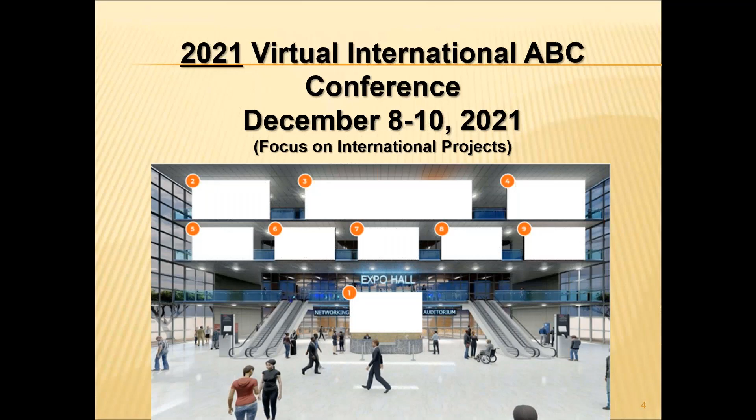The 2021 conference is going to be completely 100% virtual, December 8 to 10. 30 state DOTs, FHWA, and TRB are co-sponsors, including the ABC UTC.

We have a list of keynote talks and keynote speakers to introduce to you. The conference will kick off with comments by Carmen Swanwick, the chair of the AASHTO COBS. Our keynote speaker will be Dr. Firas Ibrahim, who I call a man of ideas, with the US DOT, so we are very delighted to have him as a keynote speaker. We have assembled an impressive list of international speakers that I'm sure you're going to enjoy.

From Switzerland, we're going to have Eugen Brühwiler discuss bridge deck overlays and beyond. From Sweden, Dr. Peter Collin will discuss some innovative prefabricated systems being used in Europe. From Switzerland again, we'll have examples of UHPC field applications. From China, Dr. Xu will discuss ABC and high-speed rail.

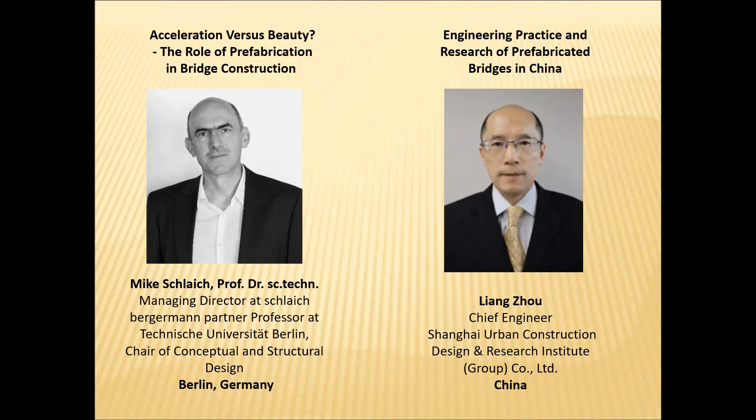From Berlin, Germany, we have a very interesting presentation by Mike Schlaich discussing ABC and the role of prefabrication in bridge construction. Dr. Zhou from China will discuss how ABC and prefabricated bridges are being used in China, and how everything is being transformed into a digital form.

We have two very knowledgeable speakers, McDonald from London and Joseph from Amsterdam, who will discuss digital transformation and building smart. This is a really interesting one that will introduce you to some of the efforts going on with digitization. On the US side, we have some invited keynote speakers very familiar to you.

That's why we didn't put the names: Ben Graybill, Bala, Mike, Culmo, Wasim, Ted Zoli, and Doreen. Everyone in the bridge community knows them.

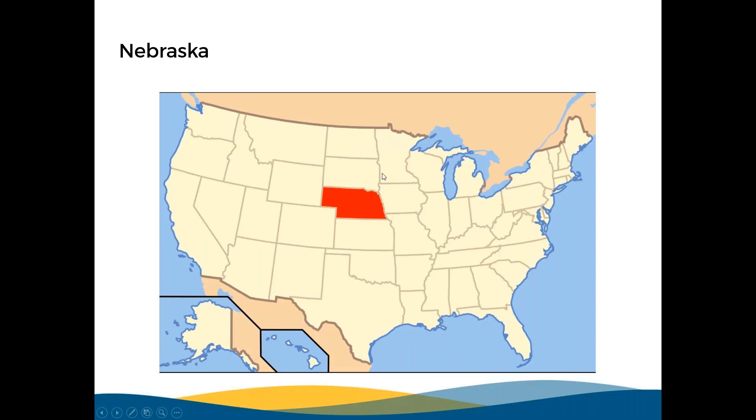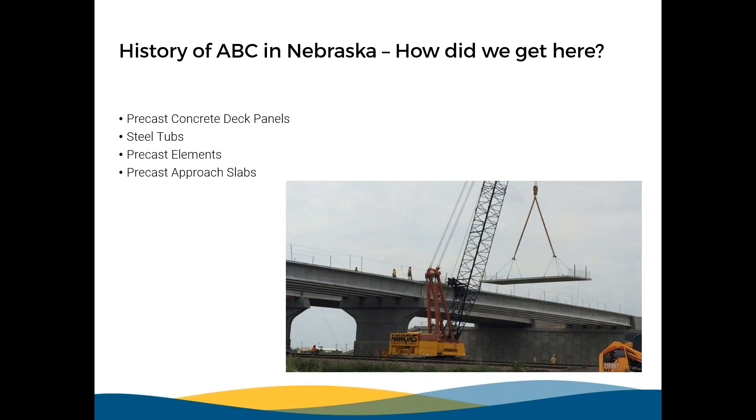So, history of ABC in Nebraska, and really how did we get here? We went through a few projects dealing with precast deck panels. We did some steel tub girders, and we've evolved through that, and we've got to the precast elements, and then some precast approach slabs that we're finding are working for us pretty well.

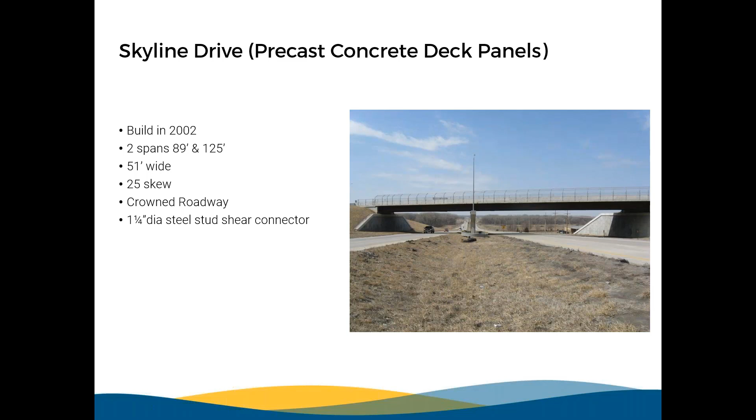Back in 2002 was really our first, I guess what I'd call an accelerated bridge construction project. It was on a bridge just west of Omaha. Probably not the easiest bridge to start with, uneven spans. We had a 25-degree skew. It was a crowned roadway, so we're putting deck panels on a crowned roadway. And we tried something new with the 1 1/4 diameter steel stud shear connector. I won't talk a lot about that, but it comes into play later.

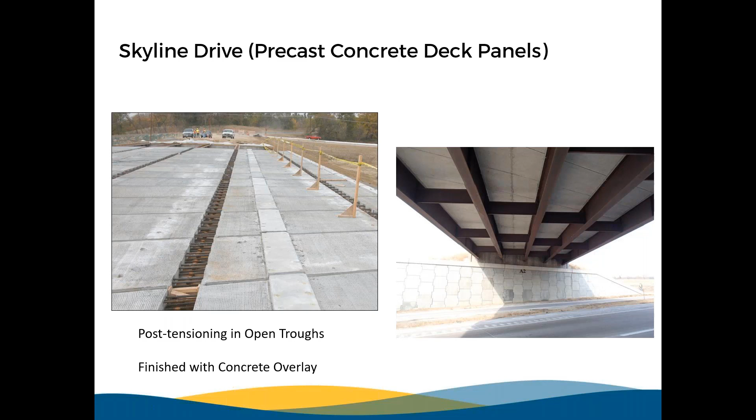So this is the project, and you can see on the left, we set the panels, they're full width. It was a crowned roadway, so we actually had the panels, we had a hinge, if you will, in the middle to make the crown go both ways to basically break the slope to go both directions. The open trough, the post-tensioning strands went through the open trough. They were mid-depth of the precast panels, and we'll talk a little more about that later. Then after this one, we had to finish with an overlay. We put a concrete overlay on these panels on this bridge when it was finished.

2003, we did a project using steel tub girders, a little more simple project, equal spans, 0 skew. We did use 100 KSI high performance weathering steel. We believe it was the first bridge with 100 KSI high performance weathering steel in the United States. So we got that feather in our cap.

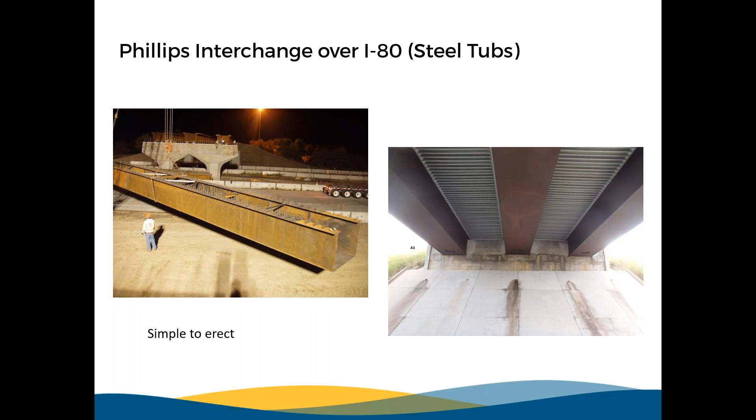It was really simple. The contractor really felt it was simple to erect these girders. Again, it's kind of going towards accelerated construction. I'll show you why in a little bit. We literally shut the interstate down for a night, put the girders up, and then opened the interstate back up after that. You can see the finished bridge on the right side.

We went on in 2008. We did another project with steel tubs. This time we did have a skew, made it a little more complicated, a 24-degree skew. This time we used 70 KSI high performance weathering steel for the steel boxes.

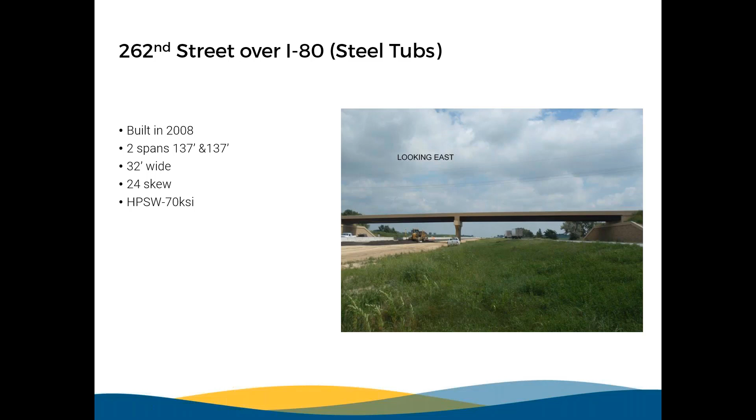So this will get a lot more into accelerated bridge construction. You can see we actually pre-topped, or put the deck on these girders. They were at the site, not on the substructure, but off to the side. The contractor placed the deck on. You can see on the right side these headed rebars.

This was before we had used ultra high performance concrete, so we didn't do that here. We just used regular concrete, but we used these headed rebar. These were screwed on. The rebar was threaded, and these heads actually screwed on like a nut. It took a lot of time to do that, and they're expensive. I think they were $1 or $2 per head, and that was a number of years ago.

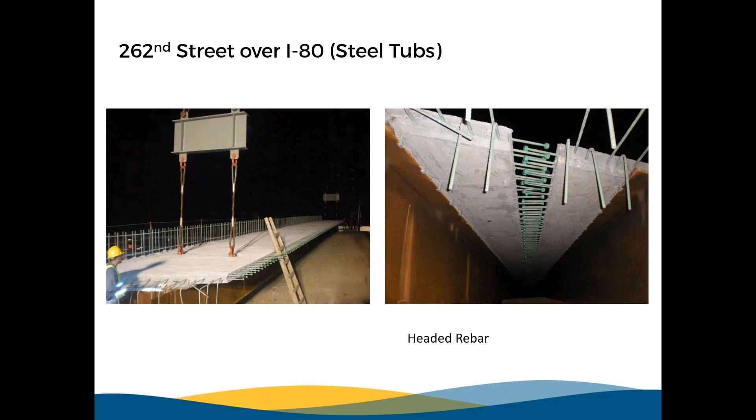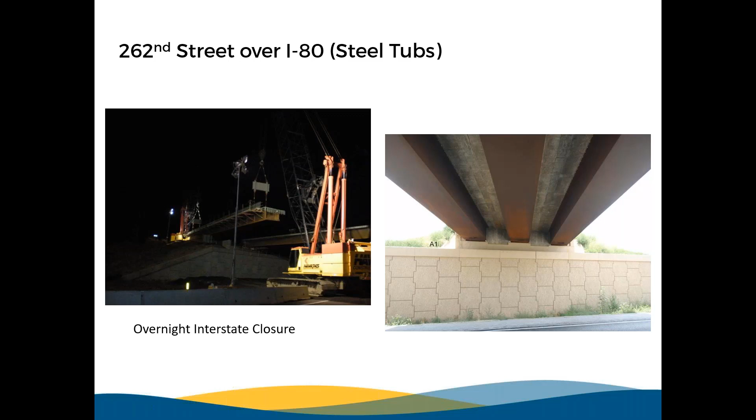So just showing the progression of where we've gone to. Pretty easy, pretty simple. It took an overnight closure. Contractor Hawkins lifted these into place, the 3 segments, and basically in the morning you pretty much had a bridge in place. It was 2 span, so it took 2 nights of closure, but the process went really, really well. Dr. Azizinamini was in Nebraska at the time and helped us out with this project.

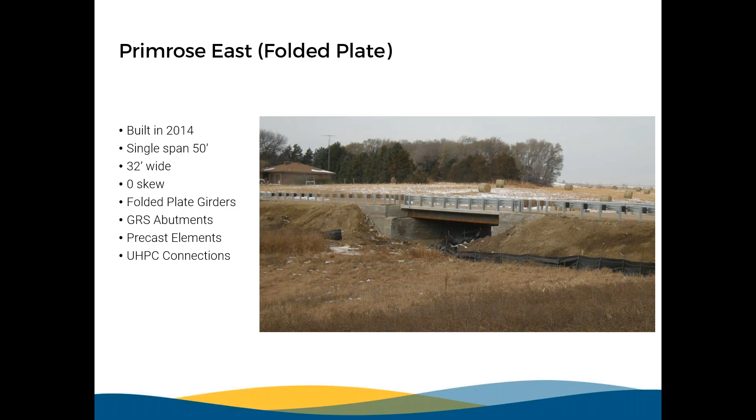On to Primrose East. This was folded plate girders. Looks like a very simple bridge, but there's a lot going on with this bridge. We did this in 2014, just a simple span 50-foot bridge, 0 skew, so that helped. But we had steel folded plate girders, again through Dr. Azizinamini. We did a geosynthetic reinforced soil abutment, so that made the abutments pretty simple. We had precast elements, and this was our first effort into ultra high performance concrete.

So the folded plates were delivered near the site. It was basically in this little town of Primrose, and the bridge was a mile or two out of town. So the contractor set this up and pre-topped these girders with the concrete deck off-site, brought them on site. You can see in this picture where they had lifted them into place. The deck is on, the back wall is on, and they just put these side by side until they basically had a bridge. So here's the difference between the other bridge I showed you, the 262nd, that had the headed rebars and the wider opening.

On the left is the joint between the deck panels, or deck segments. We use ultra high performance concrete for this, so the spacing is much more narrow - it's just a straight bar with no head on it, so it was really very simple to do. Of course, we had to get the contractor and the supplier in with the ultra high performance concrete to do that work, but it was interesting.

It worked well. We actually did a water test on this to make sure the joints weren't leaking, and it still is just a really tight structure. We're really happy with this project.

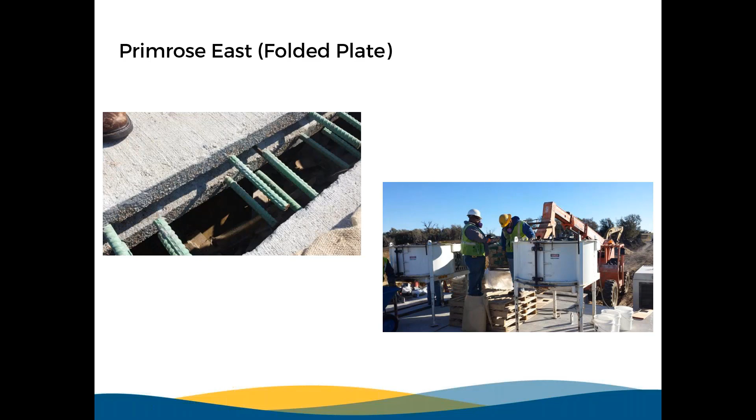Our last one I'm going to talk about before our topic of the day is our Kearney East bypass precast deck panels. These were full depth this time, done in 2016, equal spans, but we had a 14-degree skew, so it made it a little more complicated. They were twin structures - one was cast in place concrete deck, and this one was precast deck. It was a tangent roadway, so we didn't have to deal with the crown, and it was over both a railroad and a highway.

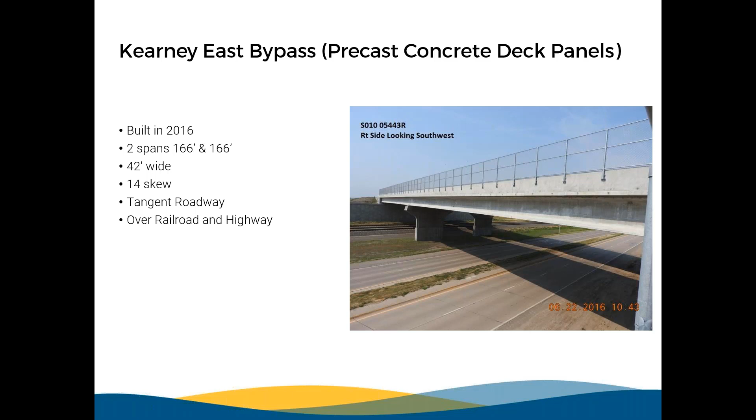So you can see I'm lifting the panel on the left side. It's full width. Again, it was a tangent roadway, so the slope went from the median all the way out, so it didn't break like a crowned roadway. So this one was easier in that respect.

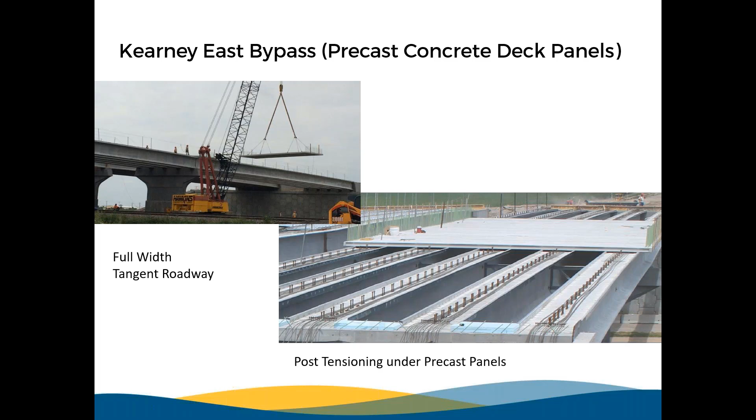On this project, we actually did the post tensioning underneath the panels, whereas on the Skyline project with the open troughs, the post tensioning was mid-depth of the panels. This was underneath the panels. We were a little concerned by doing that, but working through our University of Nebraska research with Dr. Maher Tadros and Dr. George Morcous, we found we could do this, and it worked out really, really well.

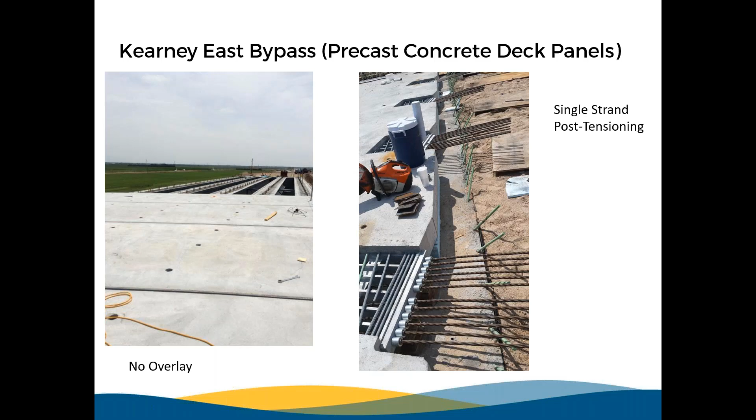So really, this was a very simple project, and it turned out really, really well. But with anything, we always want to make improvements and get a little bit more innovative.

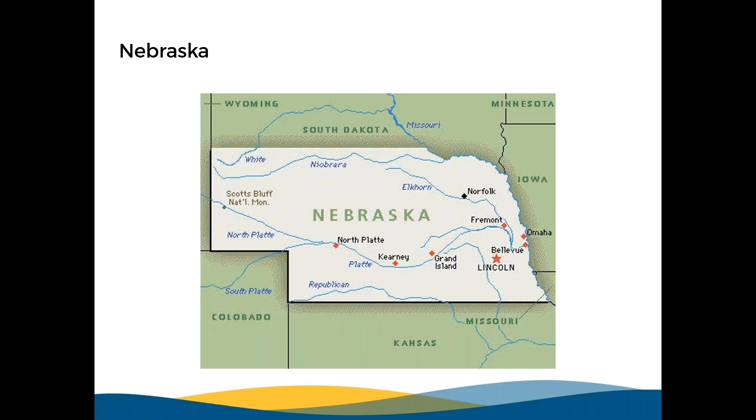Lincoln is not only where our bridge design team is, but it's also where all the precast elements were fabricated. There you can see the site, again 140 miles from Lincoln - you can see the site in reference to where our offices are in Nebraska.

A lot of thank yous to folks that did this work. Concrete Industries did all the pre-stressing and the precasting - they're right here in Lincoln and have done a lot of work for us with our NU girders, IT girders, and all of our precast concrete type structures and girders. Simon Contractor out of North Platte did the work - we had really good communications with Simon during the whole project, not only with Simon, but with our district people up in District 3 in Northeast Nebraska. So that communication was key.

Of course, University of Nebraska - we couldn't have done this without all their help with their research efforts. And of course, our partners at Federal Highway Administration, Ben Graybeal with Ultra High Performance Concrete, and David Mraz, our division bridge engineer, were really instrumental in helping us with this project.

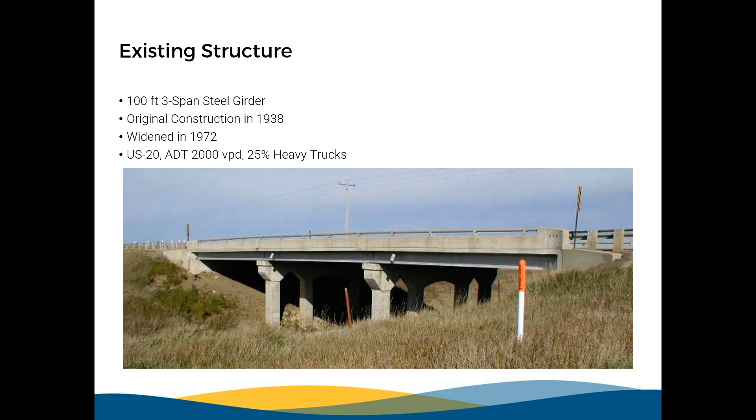The existing structure was just a 100-foot, 3-span steel girder bridge, built in 1938. It carried Highway US 20, had an average daily traffic of about 2,000 vehicles per day and about 25% heavy trucks. This project also had quite a scour problem - the stream had degraded over time, and we tried to correct some scour issues a few years before this, and it just didn't work. We had some more high water, so we had some scour concerns with this existing structure.

So we decided to do a precast element bridge, do it quickly, do it accelerated. The bridge we determined went from a 100-foot bridge to a 130-foot bridge for the new bridge, 43-foot wide, 10 degree skew, so just enough skew to make it difficult. Of course it's always better when it's square, but I want to tell everybody you can deal with skews. You don't have to find a square bridge to do accelerated bridge construction. We've done plenty with skews.

This was constructed in the 2018 construction season, designed by our in-house NDOT staff. Steve Sabra was our lead bridge engineer and did a great job with this project. Design, bid, build, so it was let to contract.

When the bridge was closed, there was a 13-mile detour for traffic needing to get around this bridge. We gave the contractor 45 calendar days to complete a road closure to complete the project, and about $3,750 per day incentive or disincentive if they got the work done earlier or got it done late. The incentive was capped at a 10-day maximum.

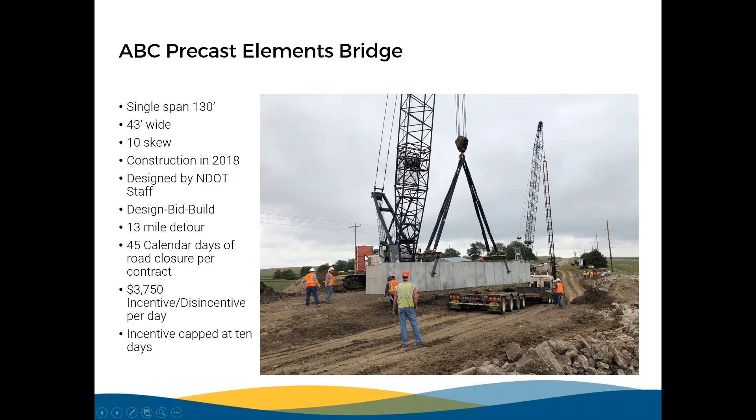So the objectives of the project, with ABC you want to minimize road closure. Really what that means is we're trying to maximize safety. Get in, get out, and stay out, get traffic back on top of the road.

We wanted to expand on our NU precast pre-stressed deck panels. We simplified the deck-to-girder connections. We provided a non-post-tension option using ultra high performance concrete. We added the precast rails to the precast deck panels, which was a good deal for us, I think. And then we basically utilized the whole substructure of precast: the abutment caps, back walls, wing walls, grade beams, and approach slabs.

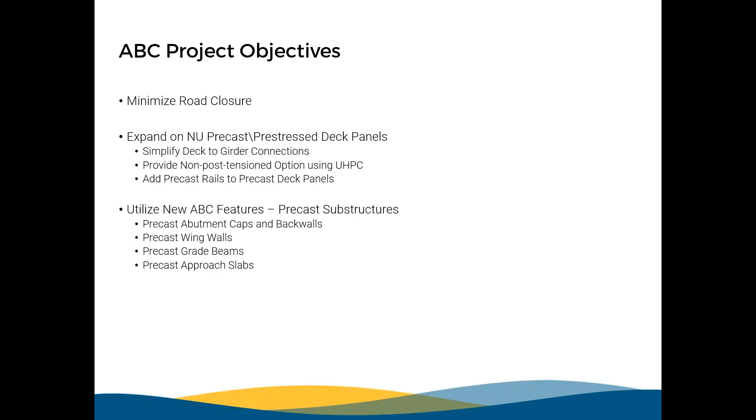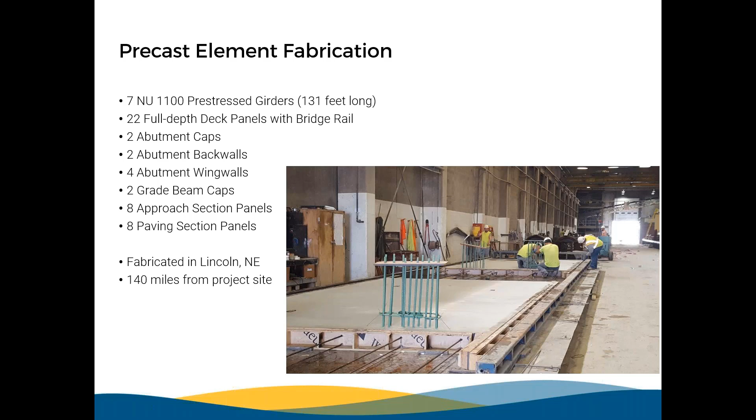So the precast element fabrication, here's all the pieces. I won't read through all of them, but all the way from the girders to the paving sections, 55 pieces. These were done at Concrete Industries in Lincoln, Nebraska, and then shipped 140 miles from the fabrication site to the project site. So basically we took 55 pieces, these Lego pieces if you will, built them in Lincoln, shipped them to the project, put them together, and used some concrete to hold them all together.

So we did have some field cast concrete to connect the precast elements. The types of concrete we used: we had high early strength concrete, which was 3,500 PSI in 48 hours. That's in the picture to the right. That was one of the joints we used high early strength concrete in.

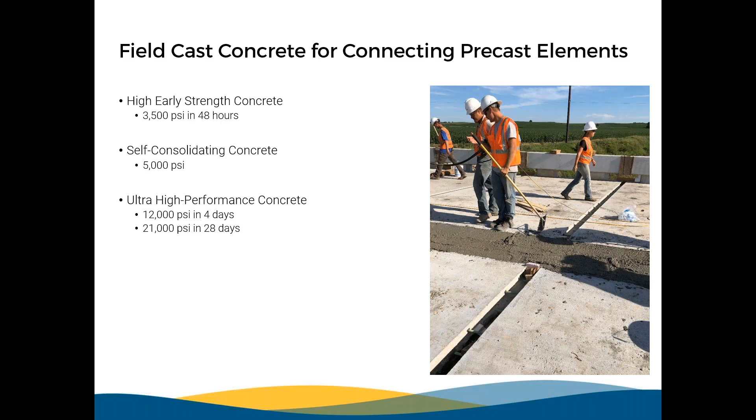Self-consolidating concrete that would flow underneath the deck panels and on top of the girders, required to reach 5,000 PSI in 28 days. And then we had the ultra high performance concrete, which, these numbers blow you away, 12,000 PSI in 4 days and 21,000 PSI in 28 days. We limited that use mainly to the transverse joints on the deck panels and the joints on the bridge rails.

But as I looked into it more, Concrete Industries uses almost exclusively self-consolidating concrete. The top of the abutment cap was stepped down because of the slope of the roadway, so in order to have the self-consolidating concrete work, they had to pour it with what was actually the side becoming the top, because that was the flat surface.

One other thing, there's a cross slope on the roadway of 2%. So the bridge rail had to be tipped in, if you will, 2%, because once they were set on the bridge, they had to be plumb. So a little bit of attention to detail when it came to the bridge rail.

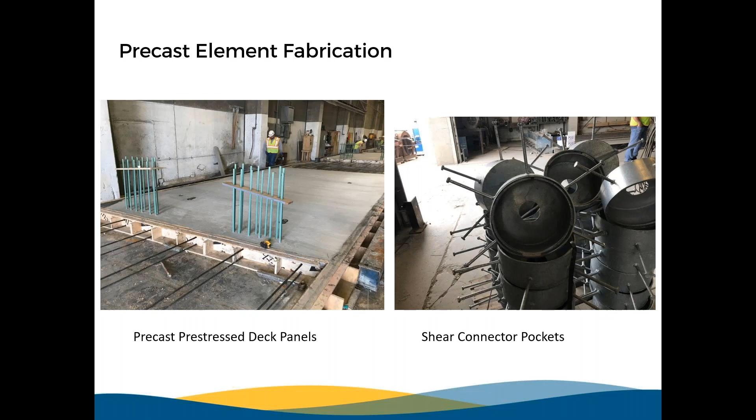So here's some of the deck panels that are finished in the yard. A few of the 55 pieces that are waiting to be transported up to the project site.

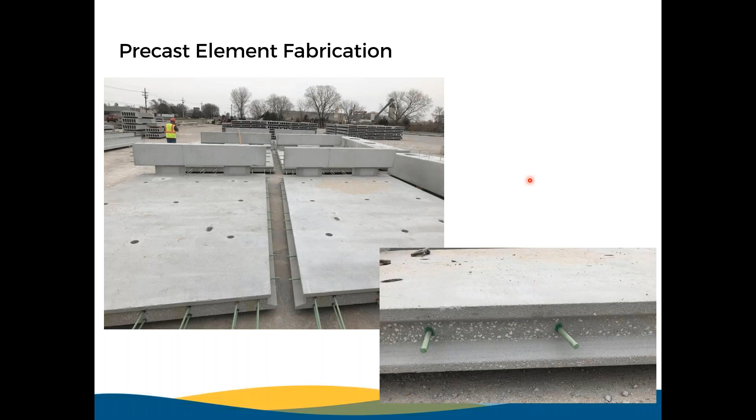So our NU girders, these were NU 131 foot NU 1100 pre-stressed girders. Of course, the fabricator used self-consolidating concrete, with a concrete strength of 8,500 PSI at release and 10,000 PSI at 28-day strength. Pretty high, we try not to go that high, but we definitely can if we need to, and Concrete Industries did a really good job for us.

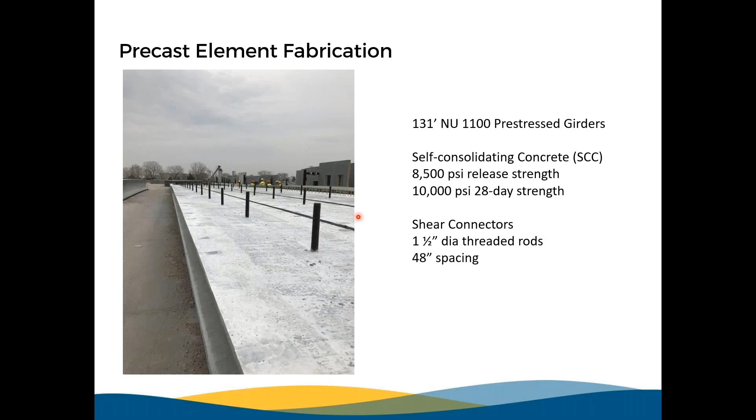The shear connectors are different than we typically use. These were actually 1.5 inch diameter threaded rods at 4 foot spacing. This was something that we had worked through AASHTO and T10 on one of our previous projects, to make sure these types of shear connectors were going to be acceptable. And these are the shear connectors that sit in those round shear pockets that I was talking about earlier. So, construction.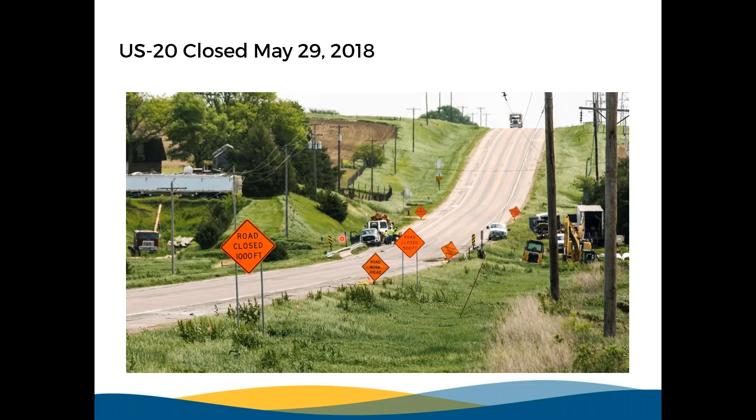Contractor closed the road, Highway 20, on May 29th to start work. It took them 4 days to remove the existing bridge and prepare the structure for the new bridge.

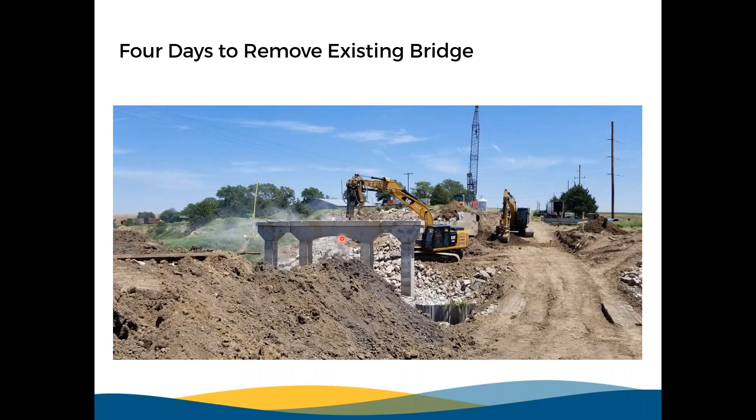We drove pipe piling, and it took the contractor 12 days to drive 46 pipe pile. The pipe pile were lengths of 80 feet for the abutments, 40 feet for the wings, and 60 feet for the grade beam, or where the approach slab sits, or approach span sits.

One thing they had to make sure of, of course, these piles need to fit inside a precast cap or wing, so they need to be pretty exact. So it took a little bit more time to make sure that they were driven in the right place. Once the precast pieces got there, they all fit together.

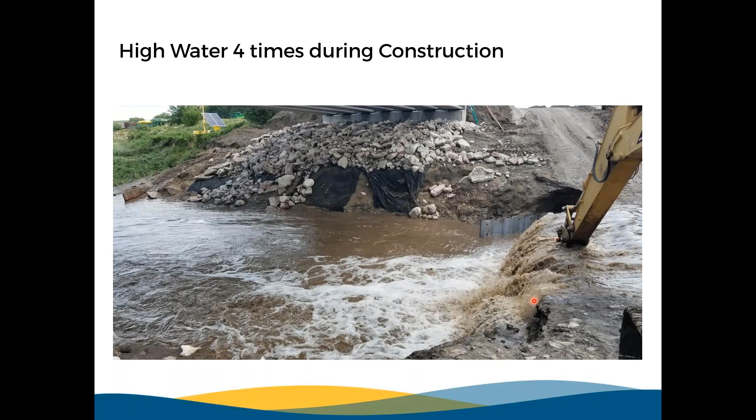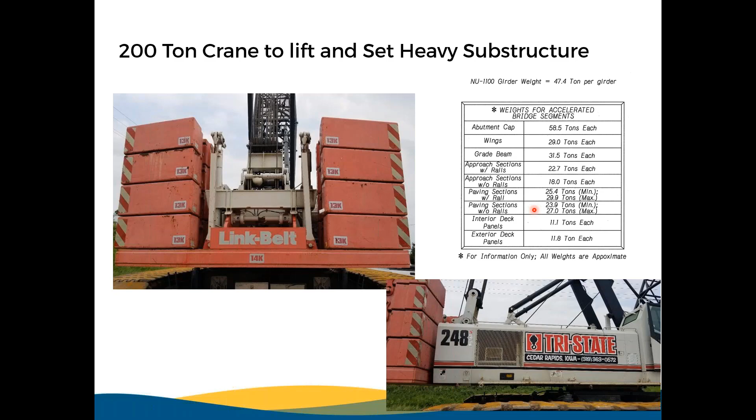The abutment cap was the big piece at 58 tons, including the back wall. We did give the contractor the option to have that come in 2 pieces, which they chose to do, and I'll show you later. So the abutment cap was about 48 tons and the back wall was about 10 tons - they broke it up so it was a little bit more manageable. The other big piece, of course, was the grade beam at about 32 tons, and these paving sections got to be pretty big too - basically they're just a big slab of concrete that sits on the subgrade.

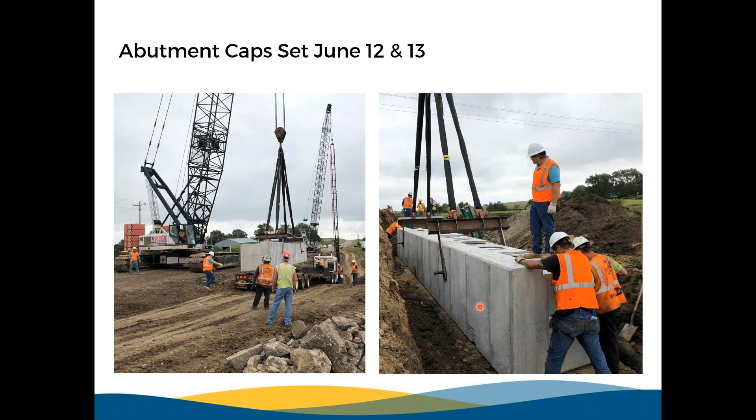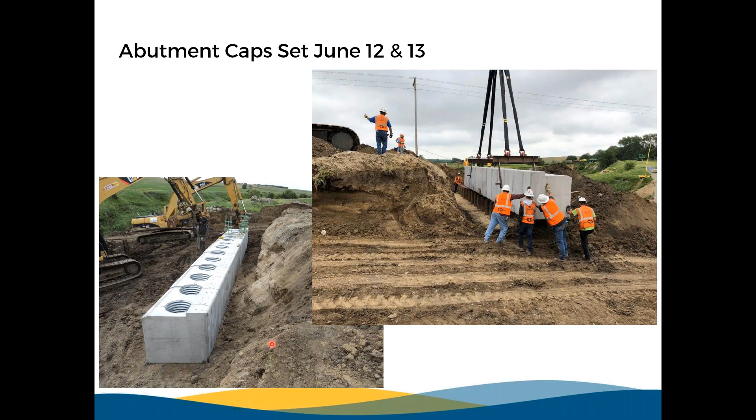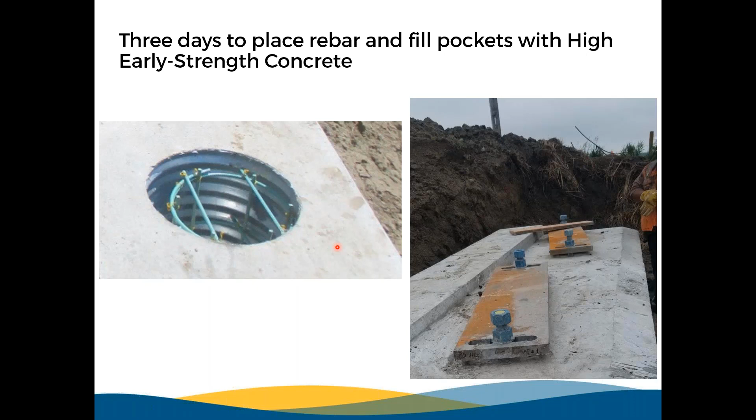One lesson learned was that we had the pipe sleeve, the CMP sleeve cast in the precast element, and it had to fit. The pipe pile had to fit inside of that, and then the rebar had to fit between the sleeve and the pipe pile. So if we did this again, we'd probably make a little less penetration of the pile into the substructure, and potentially make the pipe sleeves a little wider or bigger, just so everything fits together better.

Girder erection only took 2 days. You can see them set here, 131-foot girders, sitting on the sole plates. Pretty basic for us with these NU girders.

One thing that was a little unexpected was we anticipated 8.5 inches of camber, but these girders actually grew to 11 inches. As you can see here, they bend up quite a bit.

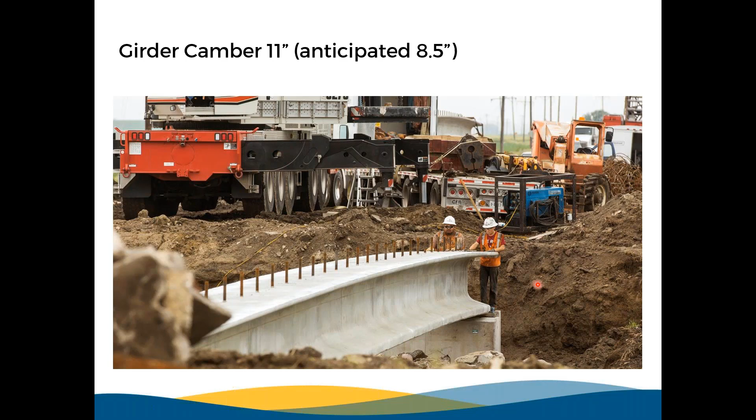So we had to modify the shim, the distance between the top of the girder and the bottom of the deck panels. That had to change the grade a little bit. We had to modify things, but it didn't slow us down too much.

This shows the girders as erected, so you can see the threaded rods on the 3 outside girders on each side. These are where the deck panels will sit. The middle is left open, so the shear connector is a little different, or a bit more normal, than what we typically do with shear connectors on our typical girders.

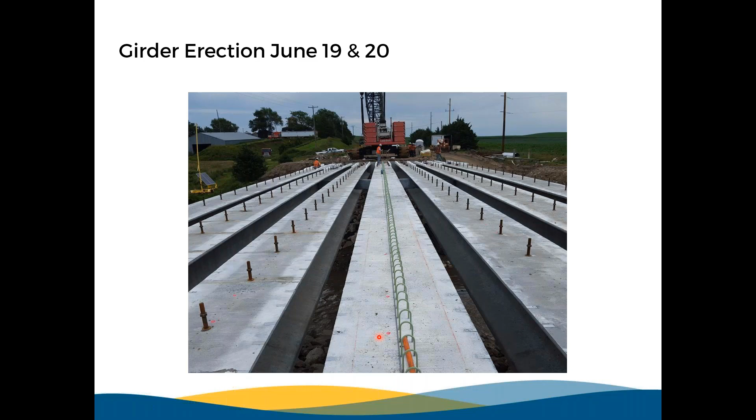The abutment back walls only took 1 day to set. Originally we had the abutment cap, which you saw placed earlier, and the back wall all together as one piece. We made it an alternate design where they could do them separately, and it worked out better for the contractor and fabricator to do them separately and just connect them in the field.

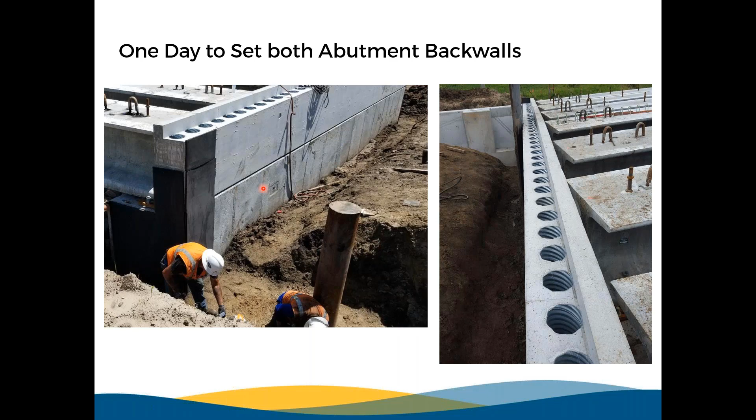The wings and grade beam took 4 days to prepare and set. It took some digging, and because the wings weren't symmetrical, just picking them up straight and level took a little more effort. Getting them around the pipe pile, getting the sleeves around the pipe pile, took more effort than we originally anticipated.

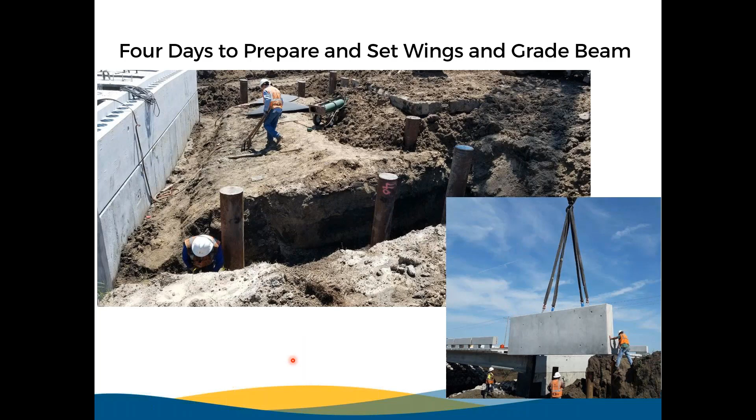You can see it better on this slide, with the wing wall, the sleeve, and this block around the sleeves. If they just picked it up straight, it would tip in, so in order to make it pick up level and plumb, they had to rig the pick a little differently. The grade beam that goes in back here, I don't think I have a picture of, was probably the most simple piece to put in, and that one worked out very well.

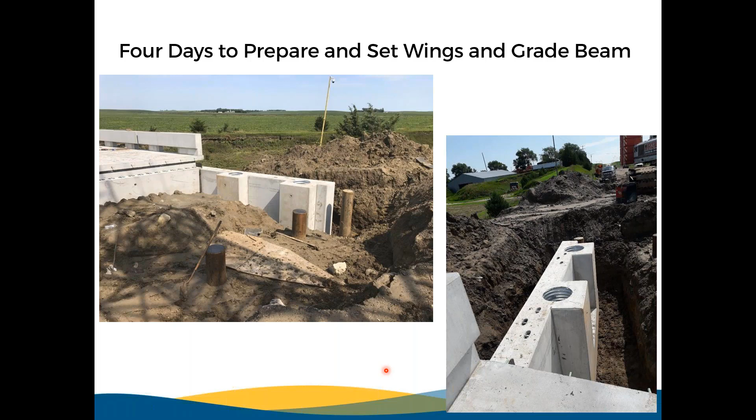It took 8 days to drive the sheet pile. The sheet pile were needed because, as I talked about earlier, the bridge that was there had some scour concerns and stream degradation. We're putting these bridges in for 75 or 100 years, so we know the stream is going to change at some point. So we put in these 33-foot long sheet pile, basically cold formed sheet pile, and the length of them was difficult, but it was something we needed to make sure for the longevity of this bridge.

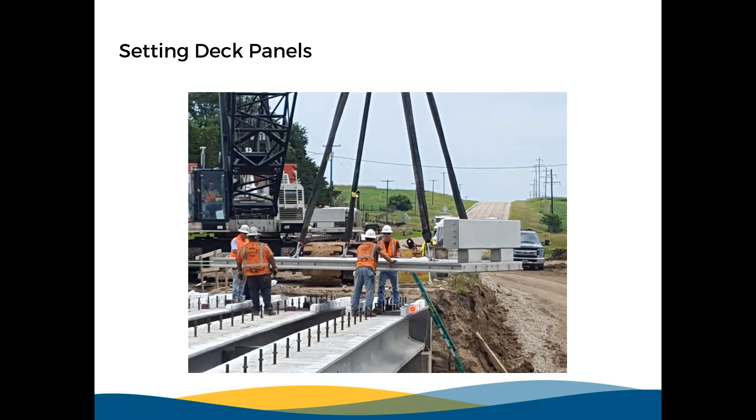This is setting the first panel. You can see they did some styrofoam blocking, or formwork if you will. I think I have a better picture of this next one - you can see the styrofoam side forms for the self-consolidating concrete.

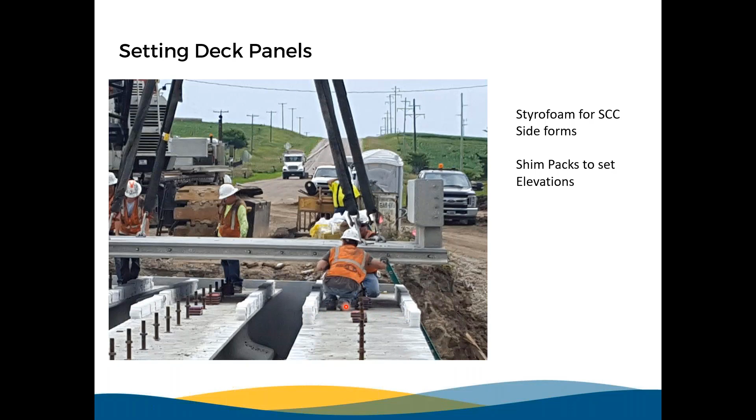And then if you see these little shim packs, that's how they set the grade for the deck itself. So what happens is this void in here will eventually be filled with self-consolidating concrete to support the deck panels on top of the girders.

And here's the shim packs that you can see again, here's the girder - they're sitting on top of the girder. This is the pack to set the grade. This would be the grade where traffic would drive.

These 6-inch bars actually stuck out farther than this concrete lip, so if you were to drop this straight in, this one would hit that bar. So you had to kind of bend them in. Unfortunately, you also had bars that went across the middle girder, and there were some shear connectors out here, so it was a little bit of a challenge to get those in without breaking that lip off.

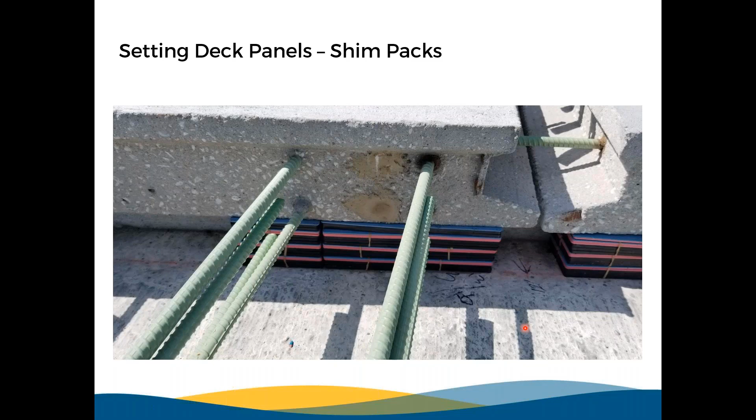So here's a little better side view. The panels are only half width - again, it's a crown deck, so the panels were half width. This was actually high early strength concrete placed here at the end.

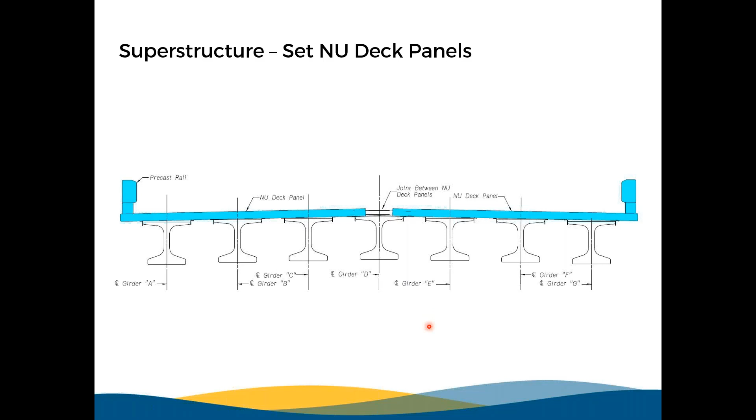The great thing about doing it this way is, number one, the panels were lighter. We had the bridge rail attached, so it was a little bit easier to set these. That way you could reference your panels off the front face of the rail. So the next panel that got put on, you'd make sure the rail lined up, and then any tolerances could be taken up where we cast the high early strength concrete.

This shows the underside of the panels. These are those pockets, galvanized. And other than that, there's nothing else down here. So basically the girder sits under this way and under this way.

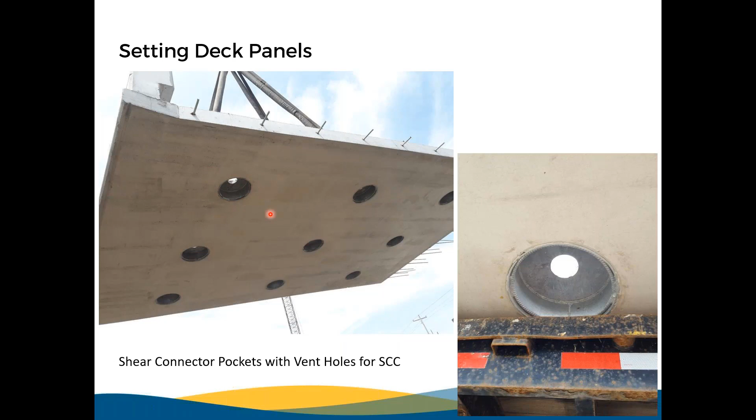So as the self-consolidating concrete is poured through this hole, it actually flows to the next one up, and the air comes out till it's full, and it just keeps going that way. It's something we did on our Kearney project, the one I showed earlier, but that one had square pockets, and this has round pockets. We think this worked quite a bit better.

Just shows the deck panels being set. This, of course, is the middle girder where we cast high early strength concrete. This is where we'd put the self-consolidating concrete.

So each one of these shear studs would come up through the pocket - it wouldn't come through the deck, it would just sit in the pocket. The shear stud would have to actually be above the bottom of the panel, but of course below the bottom of the deck.

And what we've done is a research project, because sometimes it's pretty hard to line these up to get them to fit inside that pocket. So we've got a research project completed by Dr. Morcous about having just regular shear connectors, a little bit different than this, but not really changing what we do with our girders. The shear connectors are actually below the panels, so we don't have to worry about getting them up above the bottom of the panel and making them fit, and using ultra high performance concrete to fill up the void. So again, another advancement with our university.

Last panel was set July 13th. It took 4 days for the contractor to set the panels. Of course, there was other work going on at the time—they were putting the wings on, putting the grade beam on. So a lot of concurrent things happening, but only 4 days for setting the panels.

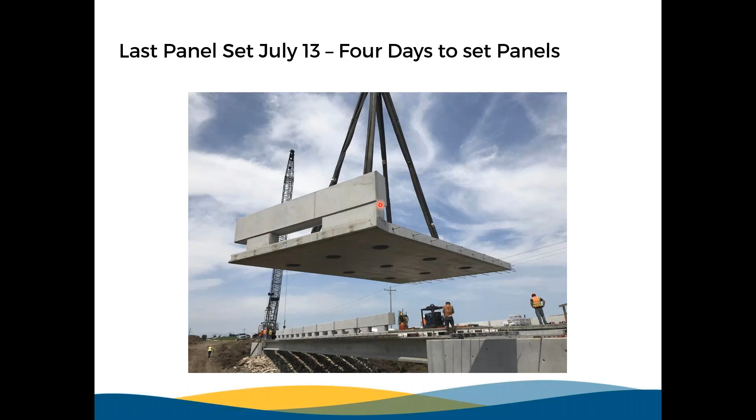You can see the pockets, and this is actually the end panel that'll hook onto the approach slab. So we're preparing the deck now to do the cast in place concrete. The first thing cast would be the high early strength concrete over the middle girder, then pour the self-consolidating concrete on top of the girder but underneath the panels, going this way. Finally, we put the ultra high performance concrete in the transverse joints.

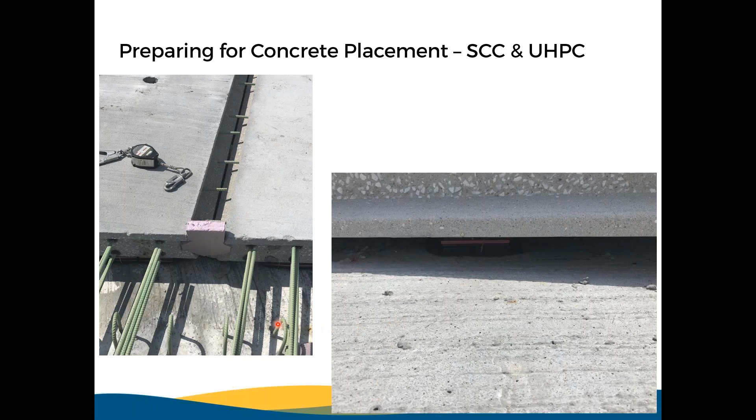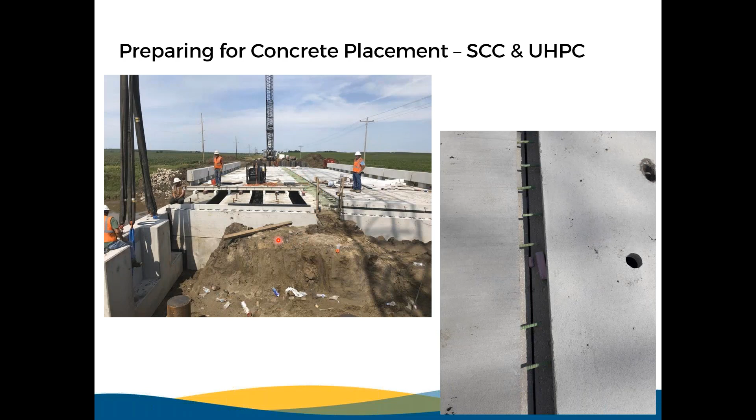So a lot going on in this picture, and you can see the shear connectors on the middle girder right there. Just another view of it—you can see better the void underneath the panel where the self-consolidating concrete will flow, and the high early strength concrete here, and of course the back wall where the approach slab will sit.

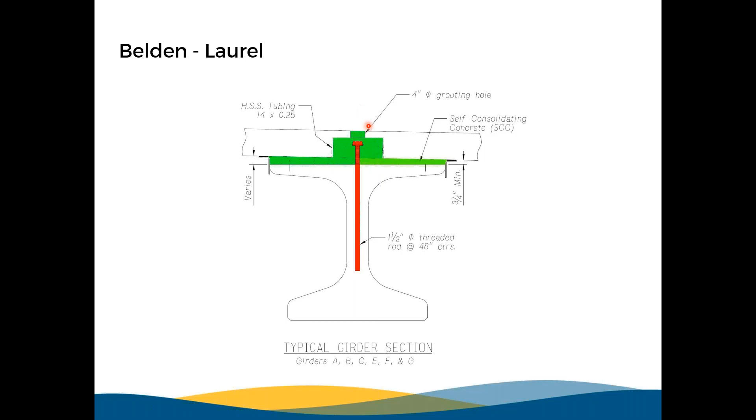So here's what it looks like. This is where the self-consolidating concrete goes. It comes down through one of the vent holes, the grouting hole, fills up, flows on top of the girder, and just moves right down to the next hole, comes out the next hole, you cover that up, and it keeps on going.

So the improvements we wanted to make, and I think we did make on this one for our deck panels—we included the bridge rail, which I think was a big thing. We simplified the shear pockets, which was helpful. And instead of using post-tensioning, we used ultra high performance concrete, so we just took another step out of the process.

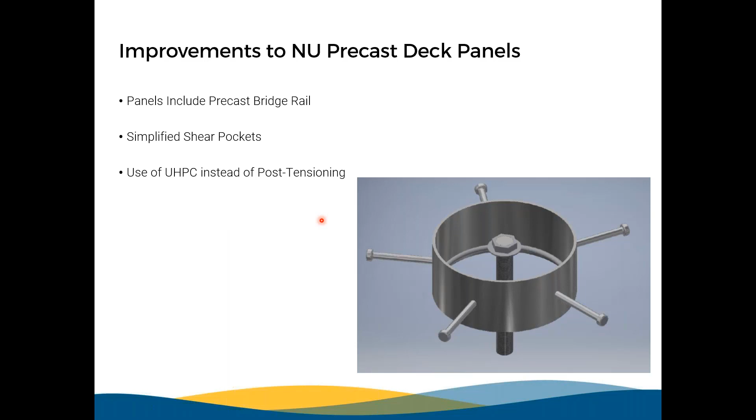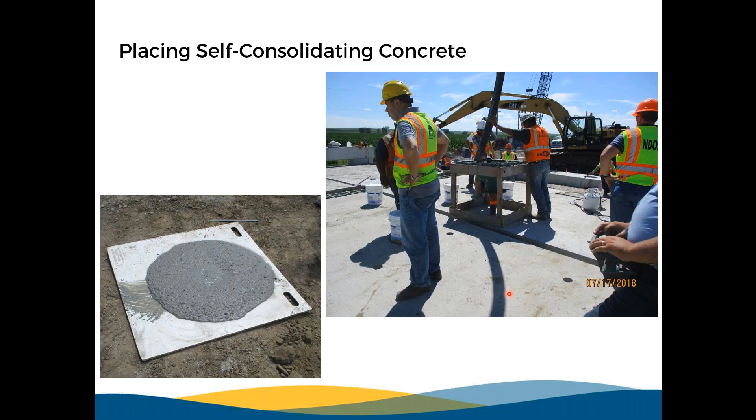Here's that placement contraption, if you will. You're pumping the self-consolidating concrete down this funnel and into one of these holes, and then it'll come up through the next holes, if you can see that. So here's the order: first fill the big joint in the middle with high early strength concrete, then fill self-consolidating concrete over the girders, and after that do the transverse joints with ultra high performance concrete. We tried to do all the ultra high performance concrete at one time, including the bridge rail.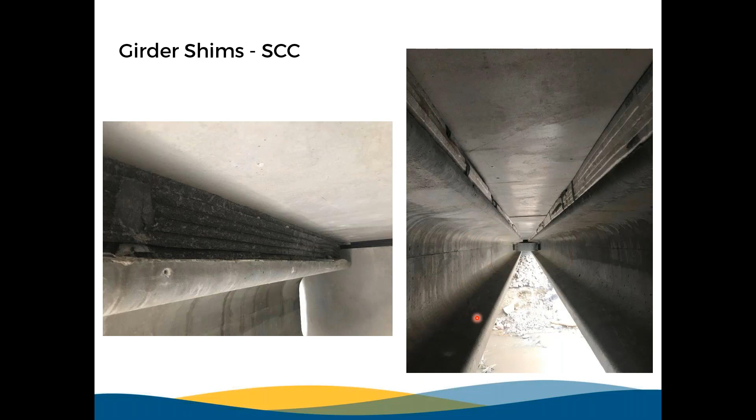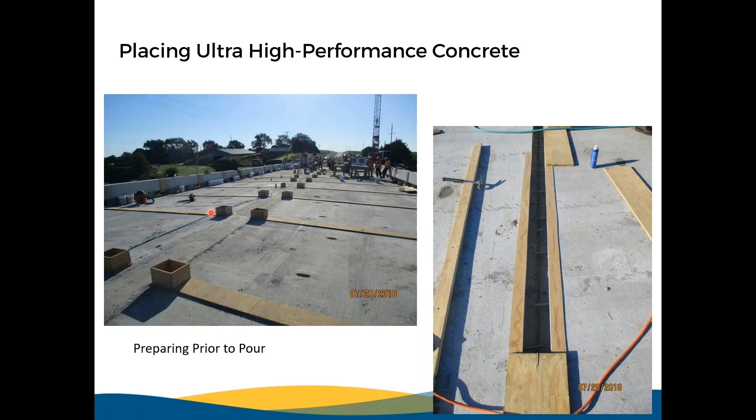Placing ultra high performance concrete, we've got our chimneys, our transverse joints, our covers—that's the setup to do it. You can see the bridge rail forms on the bridge rails. There's a close-up view.

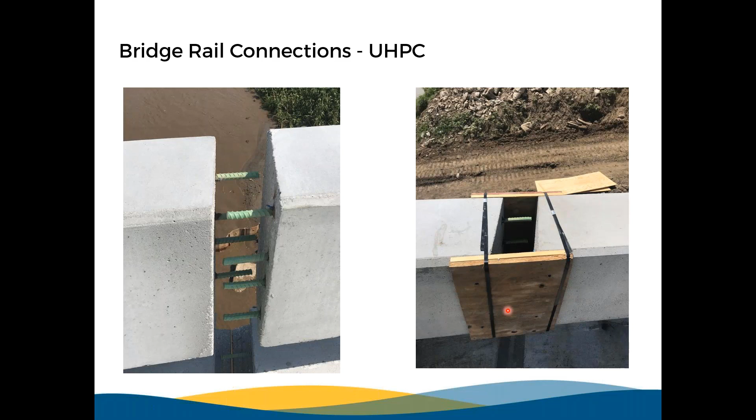Same kind of joint, 6 inches, formed it up and poured the ultra high performance concrete inside. Same type of spread, but of course this has the steel fibers in there that give it the strength. Very flowable material. We placed these boards here because we place it a little bit high and then grind it off. That's why these boards are here, and also to hold down the cover cap as it moves across the bridge, because with the cross slope, if you just left it the way it was, it would all flow to the bottom and not cover the top. So you have to, at least we had to, cover it.

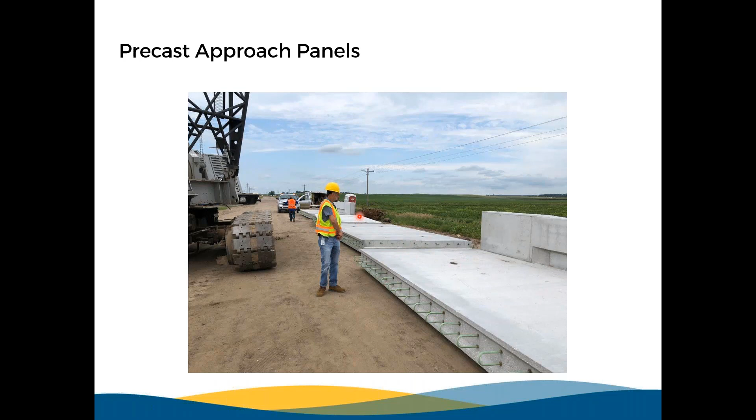Precast approach panels. So you can't have an innovative accelerated bridge construction project in Nebraska without Fouad Jaber being a part of the picture. Fouad's been really instrumental in all of our innovative things that we're doing in Nebraska. Many of you know Fouad, and here he is out on the project checking out one of our approach panels.

This is placement. Really special thanks to our District 3 construction people. Tony Vogel was the project manager up there and did a really great job just understanding how this all went together. Rob Davis, the assistant construction engineer up there, they just understood that communication was good, and it really, really went well. Had a good contractor, had a good construction inspection team, went really, really well. So we were really happy about that.

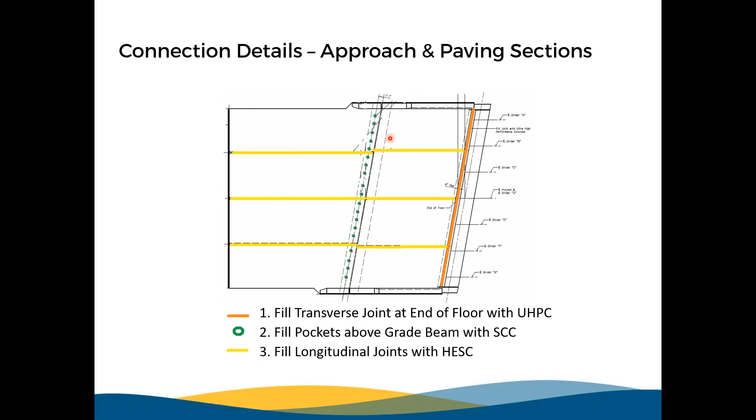Just the placement of the approach sections. We did the ultra high performance concrete with the rest of the bridge. We filled the pockets at the grade beam and then did the longitudinal joints with high early strength. Here's the last paving section panel that was set.

The crew that did it, good group of people, did a lot of great work for us. It's hard when you do this. These guys are working long hours. They're pushed by this time constraint. Gets stressful at times, but Simon Construction really, really did a nice job, and it's good to see most of these guys smiling at the end of the project.

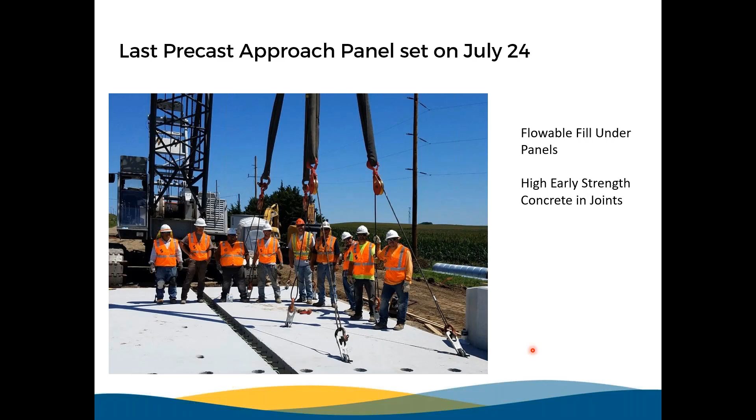And the completed project opened to traffic July 26th. We put a waterproofing membrane and an asphalt overlay on top of the bridge just to preserve that and make it congruent with the rest of the roadway.

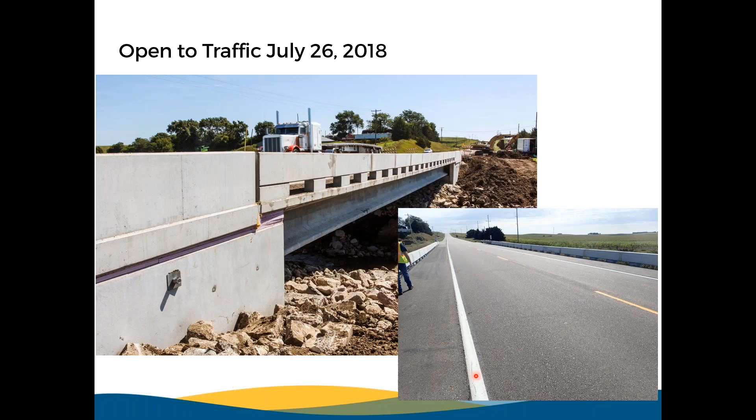A few observations and lessons learned. Of course, support from our administration, super important. Input and communication with the contractor before, during, and after is really, really important. Our precast elements shorten on-site construction time, minimize traffic, and improve safety.

One thing is really imperative, I think: durable joints. You need to have a durable joint to make this a long-lasting bridge. The precast elements themselves will last a long time because they're built in a confined area, in an area where you can really take care of things.

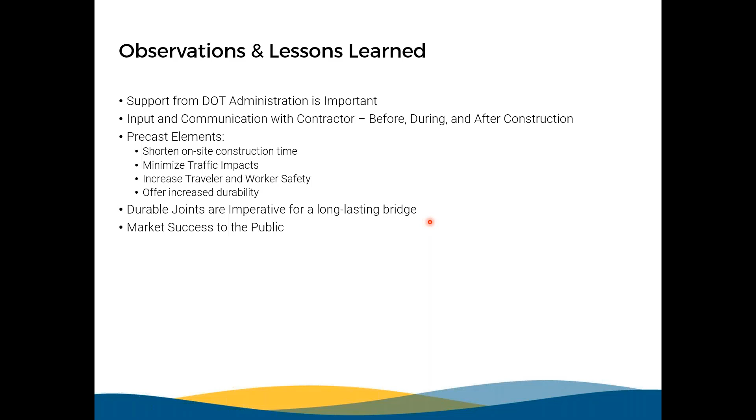Oops, did I just lose you? Can you still hear me? I think I just lost connection. We can hear you, we can hear you. Okay, good. I heard something crackle.

Last couple of slides. We did have 4 contractors bid on this project. It was mostly an asphalt paving project, but it had an ABC bridge within the project, and we had 4 contractors bid. Of course, we talked about the blockouts for the piling. We'd probably make those bigger next time.

Contractors, of course we all have a hard time keeping workers, but ones that are willing to put in the extra time and stress when it comes to the long hours and the extra commitment with an ABC project, that's always a concern. And with all these pieces, you've got 55 pieces, and sometimes the contractor felt they didn't have enough space, enough right-of-way for all the pieces and equipment to get this thing put together.

So right-of-way concerns are always an issue, and if we can make that as much room as possible, the better off we are. Communication is always key. It went great on this project between our district people and our fabrication people in Lincoln and our bridge design people, and the contractor was really good. We've got a great relationship with our local AGC here in Nebraska.

And research, we've just done some really good things along with this project. I did talk about this precast concrete deck to girder connection using ultra high performance concrete. This was done in 2019. That's where we didn't have to get the shear connectors up into the deck. And then we're also currently doing an accelerated bridge construction decision tool. Both of these professors will be attending the September 7th training from Connecticut.

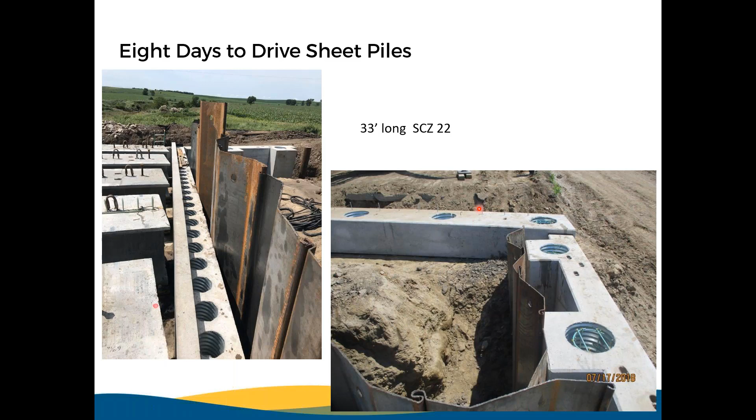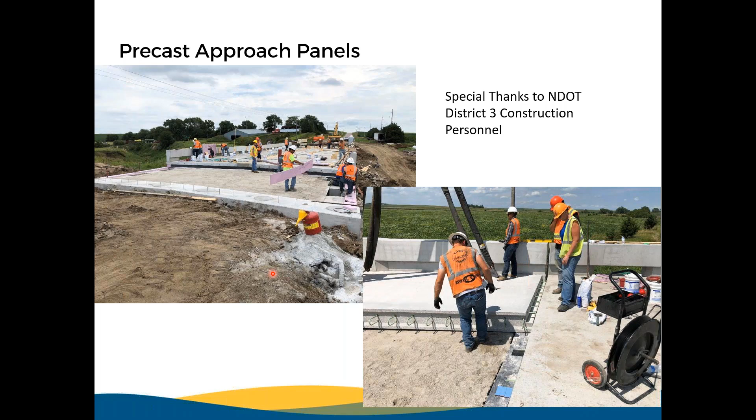Okay, thank you Mark. And just one final question - design-wise, was the deck and girders considered fully composite? Yes, oh for sure, yeah for sure. That's why we had the research on those shear connectors, why we do the self-consolidating concrete, why we do the pockets - why we do all that. So yes, for sure they are.